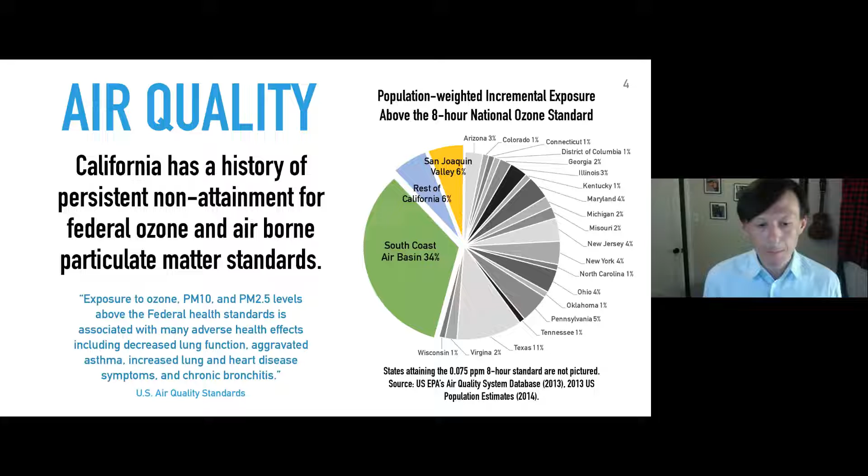California's freight transportation system is a vital part of the state's economy, but it's also a significant contributor to greenhouse gas emissions and generates an even higher portion of local pollution. In 2016, for example, a little less than 6% of the California vehicle fleet was heavy-duty trucks, but they represent more than 60% of NOx emissions and aerosol emissions from mobile sources. So these trucks tend to already operate in areas with poor air quality and can exacerbate existing unhealthy conditions.

So the state's primary strategy for reducing emissions from the on-road freight sector relies on deploying new vehicle and fuel technologies, particularly electrification of surface transportation. And electrification of heavy-duty vehicles provides an opportunity to both eliminate tailpipe emissions and also potentially reduce the total life cycle emissions, i.e. all emissions including the emissions associated with the production of the vehicle, disposal of the vehicle, production of fuel, as well as other impacts from vehicle operation.

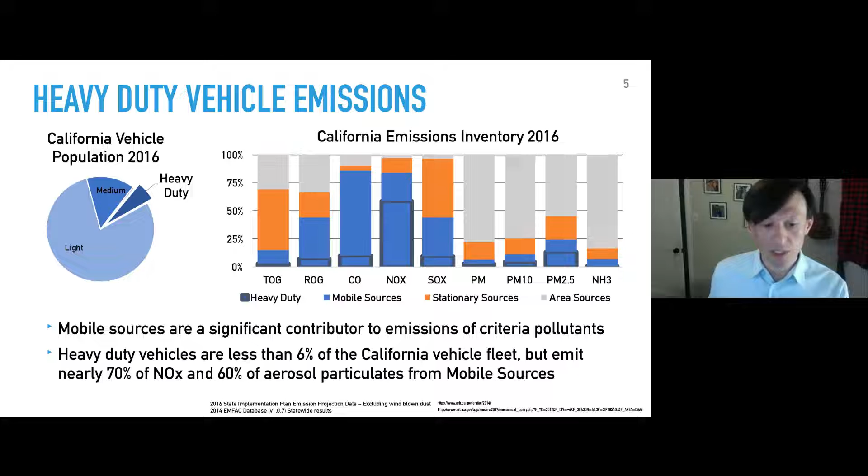So the goal of this study was to quantify the life cycle costs, emissions, and benefits in the form of reduced local health damage impacts from electrification of medium and heavy duty vehicles. The study builds upon a number of existing models and attempts to capture a wide range of vehicle vocations, designs, and duty cycles.

We focused on the California context and examined a target for 100% electrification of in-state registered medium and heavy-duty vehicles, and the focus of the study is really on the urban distribution context. So we're not including Class 8 type heavy-duty trucks that operate in a long-haul context, but rather focusing in on those medium and heavy-duty vehicles that are operating in the urban center.

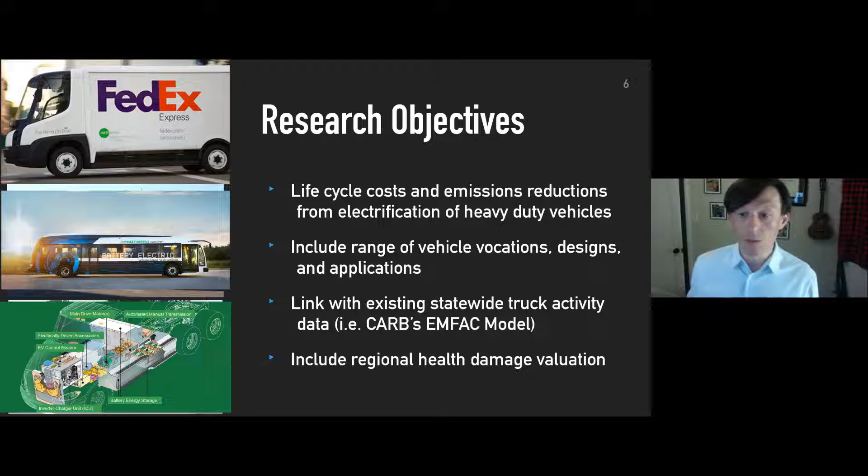In the study, we employed a life cycle perspective on emissions from conventional and electric vehicles. And this was to ensure an appropriate accounting of displaced or shifting emissions from switching to alternative fuels. And a life cycle perspective is really critical to compare potential impacts throughout the supply chain. For EVs in particular, the production of electricity is a critical component of the emissions attributable to an electric truck over its lifetime. And for that reason, our study focused on including a reflection of both current and future electricity generation in the state.

And the California grid, just to illustrate, here in California compared to some of the national case, has some of the highest targets for renewable energy generation regionally, and some of the highest renewable generation shares today. And it's important to take this into account when thinking about the potential benefits of electrifying medium and heavy-duty trucks.

So for the study, the primary source of life cycle inventory data was the Greenhouse gases, Regulated Emissions, and Energy use in Transportation model, the GREET model, maintained by Argonne National Lab. Energy and fuel price components, as well as the generation forecast, were obtained from the Energy Information Administration, or agency, apologies. And combustion emissions factors were obtained from the California Mobile Emissions Database, the EMFAC model. And we used speed-weighted combustion emissions factors to capture the differences in emissions over a duty cycle.

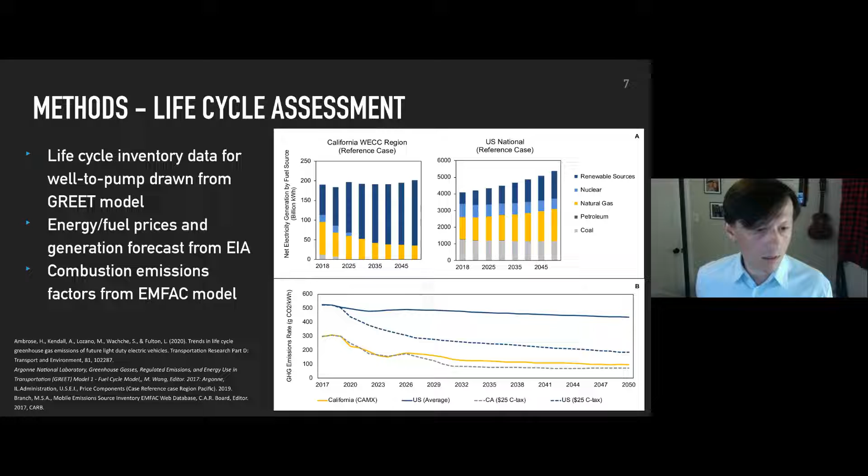This emissions analysis was paired with a model of life cycle cost, which includes pollution health damages. So pairing life cycle assessment and life cycle costing offers a robust framework for considering the costs and benefits of technology changes in the transportation sector. And the primary source of data for cost estimates here for the infrastructure costs and vehicle costs was drawn from the AFLEET model, another model that's maintained by Argonne National Labs.

In addition to the infrastructure and technology costs, we also included potential externalities in the form of reduced pollution health damages. And these marginal pollution health damage costs in the form of dollars per ton at near ground emissions levels were obtained from the Air Pollution Emissions Experiments and Policy Analysis model, the AP2 model.

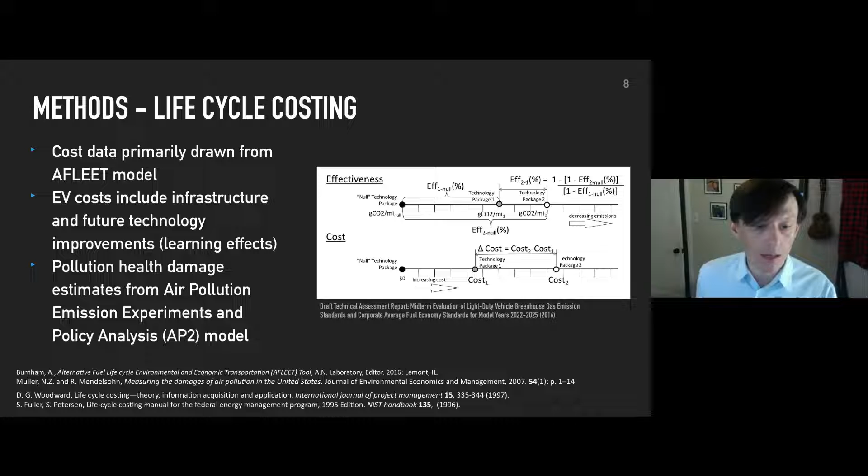So heavy-duty vehicles serve in a wide variety of vocations. They're highly customizable, including body and chassis configurations, which can be designed to support a variety of applications. And this diversity of duty cycles contributes to considerable uncertainty when estimating the costs or emissions benefits of electrification or fuel switching in general. So in order to endogenize that variability into our modeling, we evaluated a range of telematic data from fleets to characterize duty cycle characteristics, including the driving range, duration, acceleration, and stopping events.

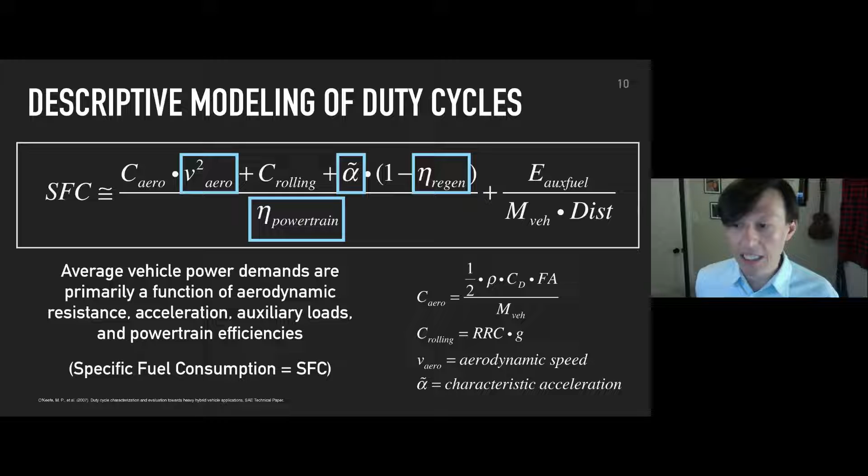So similar to the scaled tractive power approach used in some existing models like MOVES, we developed a descriptive model of vehicle duty cycles based on a specific fuel consumption metric. This allowed us to create a disaggregate view of costs and emissions reductions from electrification across this range of duty cycles, and also capture potential efficiency improvements in specific applications. And this approach also allowed us to examine the impacts of loading on fuel consumption.

To illustrate here, we can see the difference of a fully loaded versus unloaded vehicle type across a range of different vocations. So this can be highly important for comparing high intensity or highly inefficient duty cycles, like those moving cargo short distances around intermodal hubs.

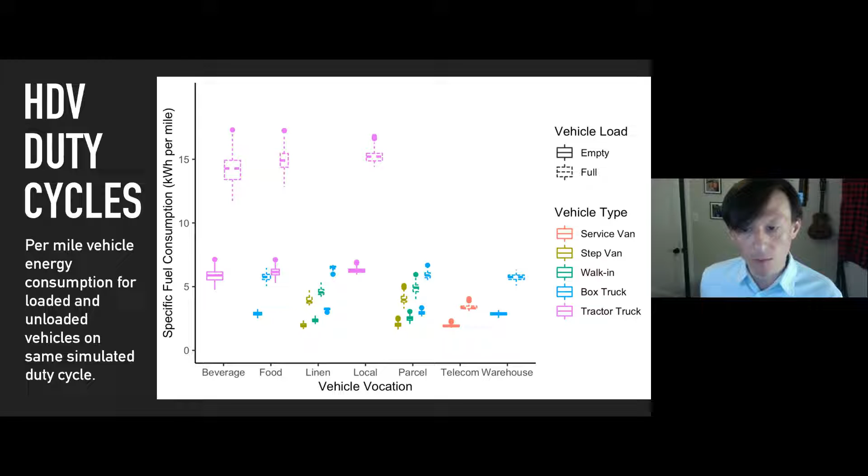Another unique contribution of this work was an in-depth examination of battery costs and energy storage and infrastructure costs for electric vehicles. Battery cost is a key driver of electric vehicle costs, but battery system sizing and the design of infrastructure are kind of a jointly estimated issue and highly dependent on the duty cycle requirements. So in order to examine the energy requirements of different vocations and duty cycles, we also analyzed trip patterns and durations to identify opportunities for opportunity charging.

So these opportunity charging scenarios can help inform potential futures where we have smaller battery sizes, but more available charging infrastructure, which has a trade-off in providing more efficient cargo space, as we have less cargo capacity or weight capacity of the vehicle tied up in an electric vehicle battery.

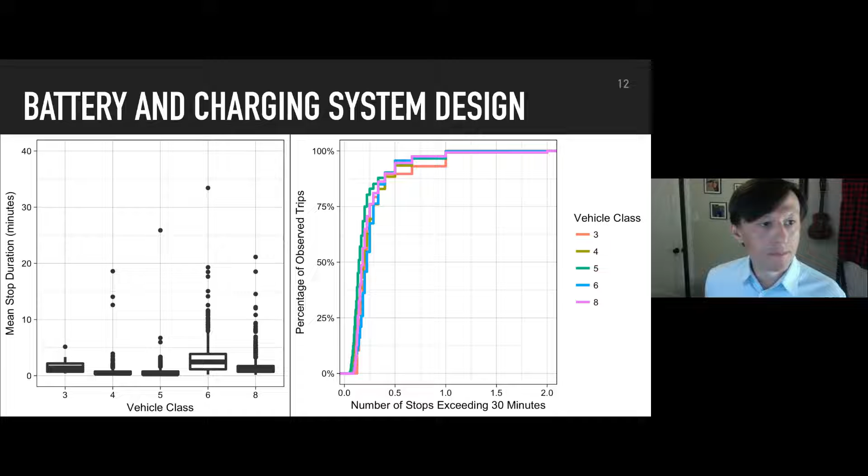I'm moving quickly through to just highlight some results. I want to keep moving so we can have some time for questions, as I think discussion is often very fruitful. So I'll just highlight a few of the takeaways for this, and I'll provide a link to the report at the end, and please feel free, I encourage everyone to review the results themselves.

So the wide range of efficiencies observed, particularly within the Class 8 segment, contributed to increased uncertainty in the emissions from EVs. So the efficiency of the vehicles on the duty cycle, a lot of duty cycles that required relatively high energy consumption, contributed to higher uncertainty in the emissions observed from EVs.

Unsurprisingly, when we look at this on a ton-mile basis, the trends tend to reverse, where smaller vehicles tend to look like higher emitting on a unit of mass transported basis. But in general, we observed that the life cycle emissions rates of some heavy-duty vehicles in these vocations were much higher than the estimated combustion emissions rates on average assigned to that vehicle class.

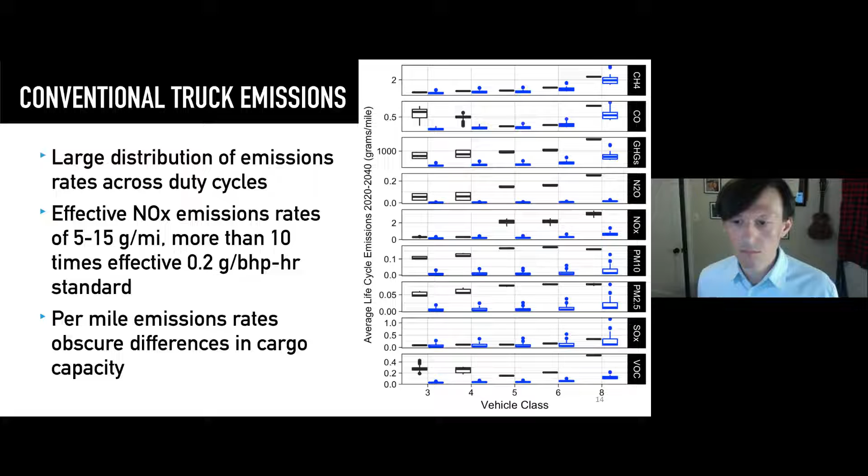So today, the costs of electric medium- and heavy-duty vehicles remain highly uncertain. And one of the big drivers of this, in addition to variability in duty cycles, is the variability in energy costs. Electricity prices can vary quite strongly across regions depending on demand charges and other types of rate structures. In California, obviously, there's been a considerable amount of development on this front, with collaboration between utilities and fleets to come to agreeable rate structures. But given the variability in rates, that can contribute to a lot of variability in the potential fuel cost savings.

In addition, as battery costs are falling, performance is improving, which means that the amount of mass required to move the battery, as well as the amount of cargo capacity that might be lost to an additional battery system, will also decrease. And this means that electric heavy- and medium-duty trucks are more likely to be economical in an increasing range of applications.

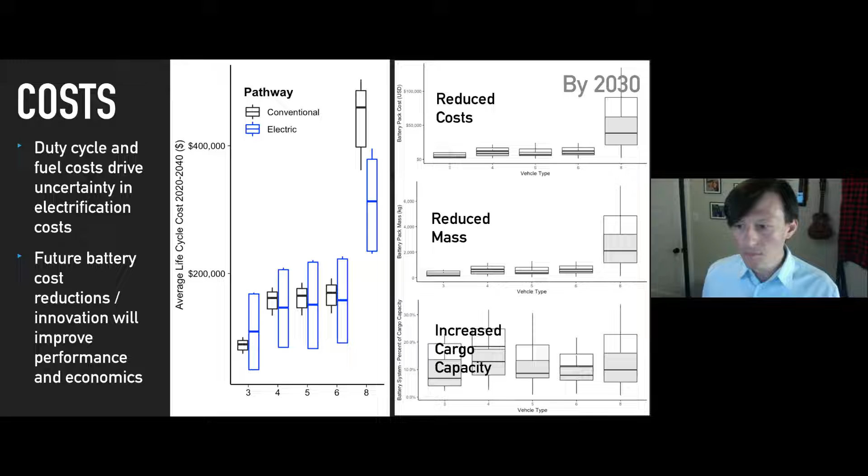So this report is available for download, and I encourage anyone to feel free to examine it and reach out with any additional questions. There's a lot more research required to understand and improve our ability to quantify the benefits of vehicle technology and fuel switching, particularly of electrification of surface transportation in the medium- and heavy-duty sector. And there's also an opportunity, I think, at a finer scale to look at rerouting, geofencing, or other strategies which can help reduce exposure to conventional vehicle emissions in the meantime, while we collectively pursue a low carbon fuel system.

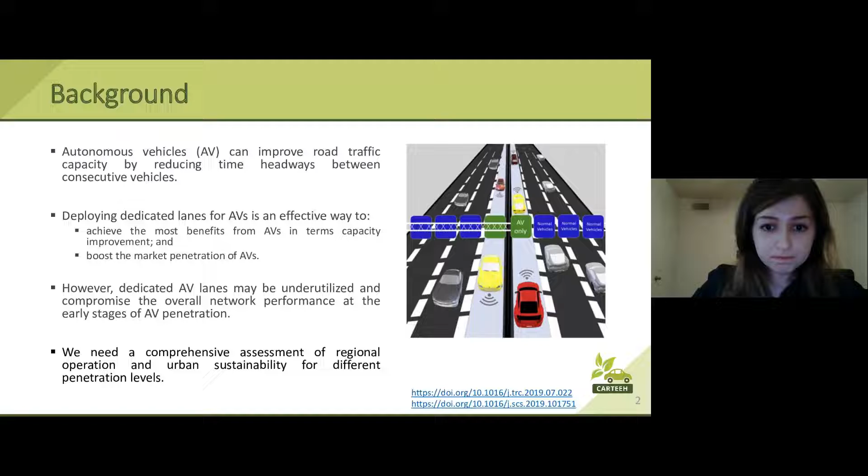Our study's goals were first to incorporate the AV demand activity into the current travel demand model, and second to construct the dedicated AV lane configurations into the existing roadway network. Finally, we wanted to assess the environmental and societal role of dedicated AV lanes at both regional and project levels. So we assessed the greenhouse gas emissions and other criteria pollutant emissions as the environmental assessment, and we studied the health impacts or the asthma cases attributable to traffic-related air pollution as the societal impact of dedicated AV lanes.

So our case study was done in El Paso. El Paso is located on the southwestern part of Texas, and it's a major freight hub with several ports of entry to Mexico. So there is a high traffic activity and truck activity in this region, and El Paso is designated as a non-attainment area for particulate matter 10 according to the National Ambient Air Quality Standards. So every transportation project happening in this region needs a vital emission and health assessment.

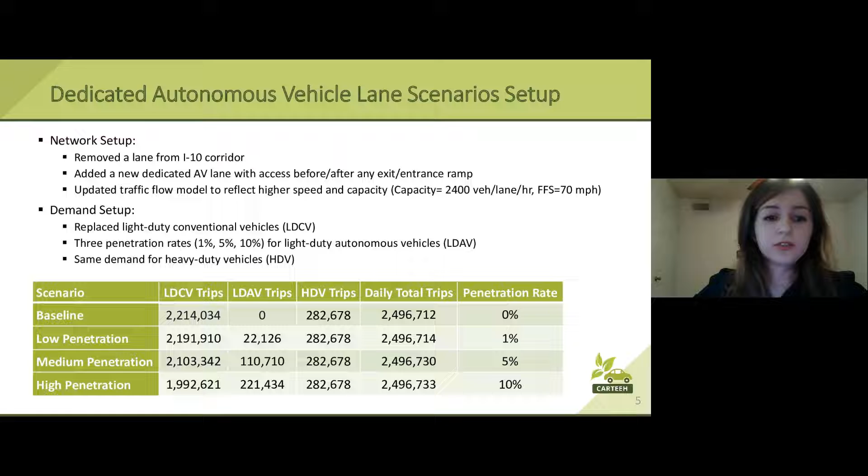Next setup point was to set the demand for the autonomous vehicles. We replaced some of the light-duty conventional vehicles with light-duty autonomous vehicles at 3 penetration rates, 1%, 5%, and 10%. So you can see the four scenarios here in the table, and the baseline has 0 penetration rate, and the highest penetration rate is 10%.

Then we used our platform to assess transportation health and sustainability tool, PATH, to assess the environmental and health impact of each scenario. PATH is a cloud-based modeling platform for automating and integrating transportation emission and energy models.

The pipeline first gets the travel demand models and adjusts them using our penetration rates for autonomous vehicles. Later, we use these demands to generate the network congestion using the dynamic traffic assignment. Then we generate the link level emissions using the MOVES matrix and the network congestion, and we assess the pollutant dispersion using AERMOD. Finally, using the health impact studies, we assess the asthma cases attributable to traffic-related air pollution at each neighborhood.

Each scenario has been conducted 5 times to include the significance of the environmental and health impacts.

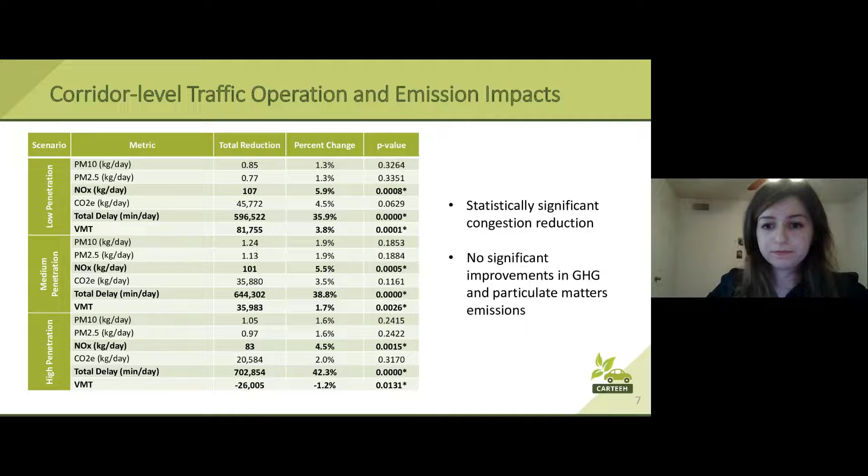Also here in the higher adoption, higher penetration, you can see some of the vehicles were rerouting from other alternative routes to this I-10 corridor. According to the table, we cannot really capture any significant improvements in greenhouse gas emission or particulate matter emissions.

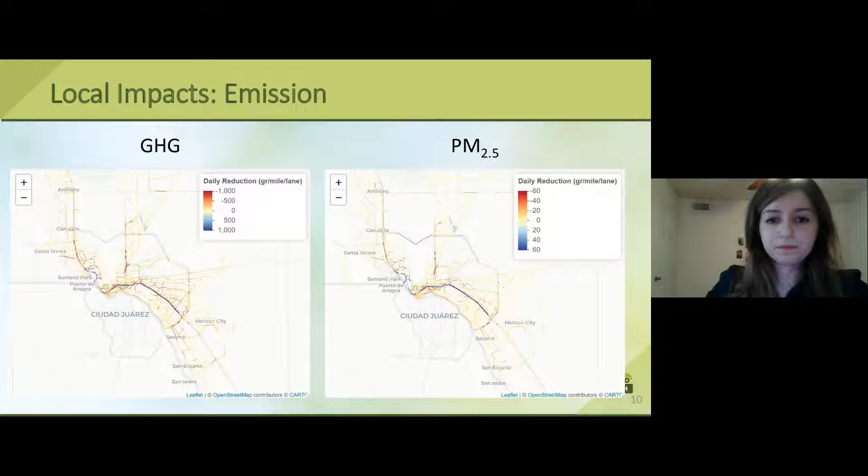Again, translating it into the dispersion and attributable asthma cases, we can see some changes at different splits of the corridor, localized changes at the alternate routes, at the downstream and upstream, and around the border.

So in this study, we assessed the environmental and health impacts of the dedicated AV lane, and environmental impacts were assessed using the greenhouse gas emissions and criteria air pollutants. And societal impacts were also assessed in terms of health impacts or asthma cases.

Significant congestion reduction was observed at both corridor level and regional level, and no significant changes were observed for the regional emission. However, we could observe some localized emission and health changes, asthma case changes, in our spatial map. So a dedicated AV lane is really an effective tool for congestion relief while changing the flow pattern for the emission and health.

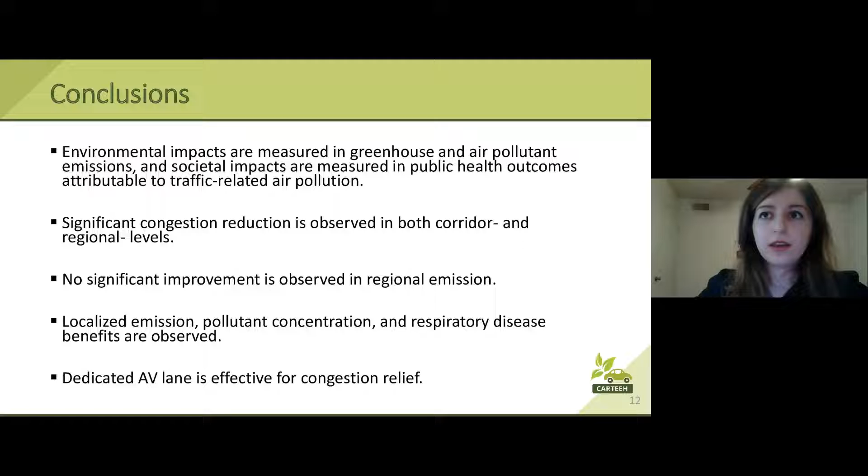Dedicated AV lanes are actually a lane management plan, and they manage the lane by assigning the access. So like all other lane management plans, they are a viable option for congestion relief. They cannot be counted as a climate change tool. And still we can observe some changes over the local neighborhoods in the emission and health impacts. However, zero emission AV lanes may promote zero emission AV penetration in the region more, and they may have different implications if we study those cases.

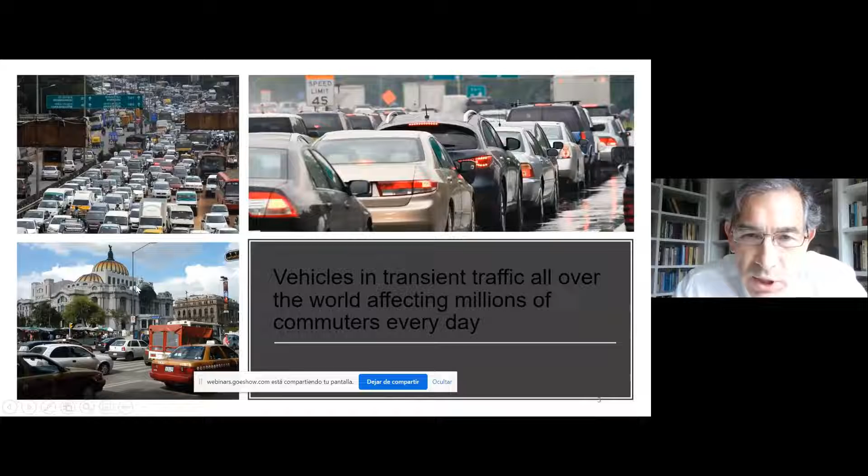Transient traffic, stop-and-go traffic, is a ubiquitous feature of daily urban life. As motorization grows, this phenomenon is certainly going to grow even more. Larger portions of commuter time will be spent under these conditions, consuming energy and aggravating emissions. Since transient traffic includes sharp braking and short accelerations, usually after a long idling time, important fine-scale dynamics must be included in the analysis. There are a lot of events that happen in very short time that have to be included in order to capture all the dynamics of this type of traffic regime.

Also, this traffic regime is difficult to reproduce by a driver, even under controlled conditions in a laboratory. And if you try to circumvent this problem by averaging, then important dynamics might disappear. In today's presentation, I'm going to have a different approach from what was previously presented, in that my approach is microscopic. That means I'm going to be following vehicle by vehicle at a 1 second time scale. And this microscopic approach is especially tailored to study transient traffic.

Basically, this scheme is based on an observational technique using video tracking analysis to capture necessary high-resolution dynamics, as I will show. Two, an agent-based traffic model, SUMO, to obtain high-fidelity driving cycles, and it's a microscopic agent-based traffic model. Number three, we pair all these to a complex vehicle simulator to obtain energy use, fuel consumption, and emissions of

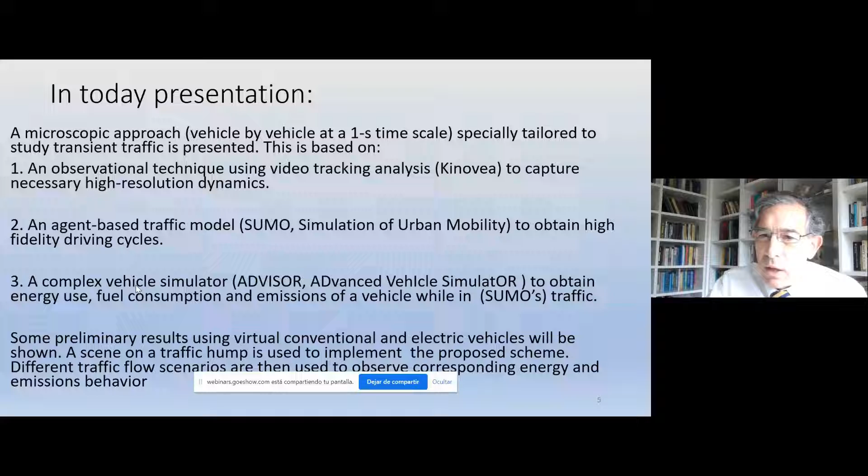The scene where we apply all this scheme is on a hump in a street, because therefore we can use a theoretical model, a theoretical M/M/D traffic queuing model that we can compare our results with, besides, of course, the measurements. And once this is accomplished, that we know our system is working fine, we then vary the flow scenarios and observe the corresponding energy and emissions behavior.

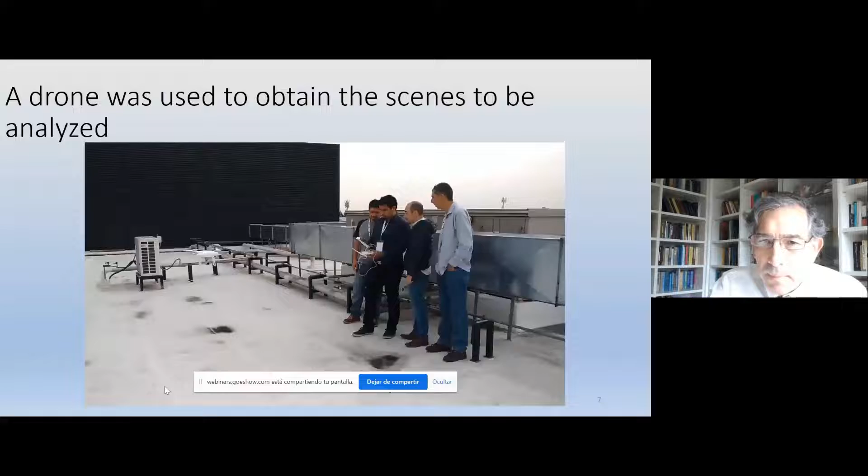So what about the video tracking observational technique? Well, we use a drone in order to obtain the video of the place where we are going to be observing the traffic. And this is the output of the Kinovea tracking system, in which you can see that we are able to obtain the velocity of the vehicles, the instant velocity, quite well characterized. Every second we are able to obtain the instant velocity of all vehicles passing through the hump, which is not very well marked.

So when you drive in Mexico City, be very careful.

But the important thing is that you can obtain the instant velocity very accurately using this video tracking technique. Also, you can obtain the traffic flow characterization, different types of vehicles that are passing through your scene, through your window. And you can also check the lanes distribution. This is going to be important for when you apply queuing theory. And of course, you can obtain the hump crossing speed of all the vehicles that are going through.

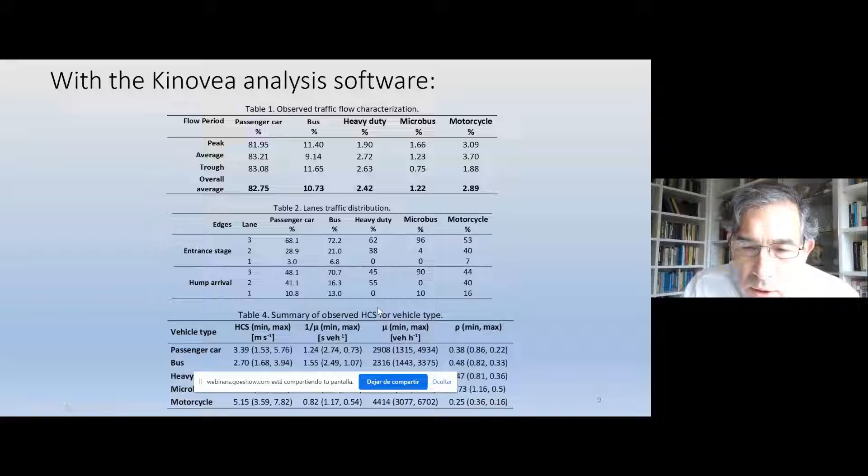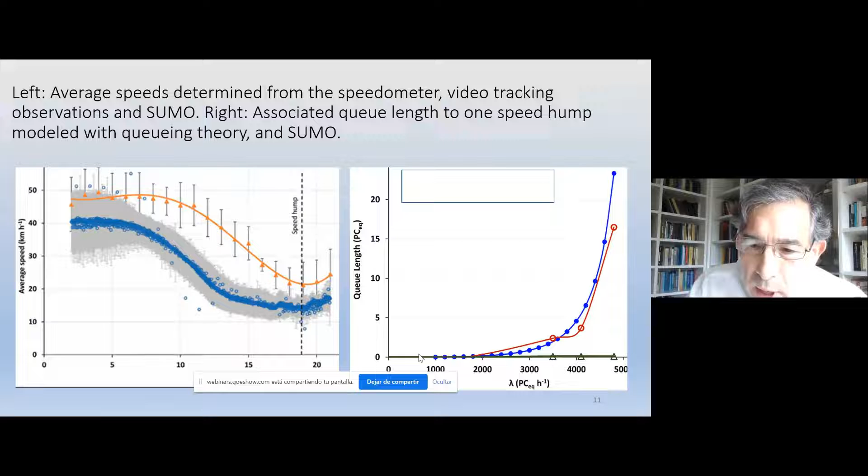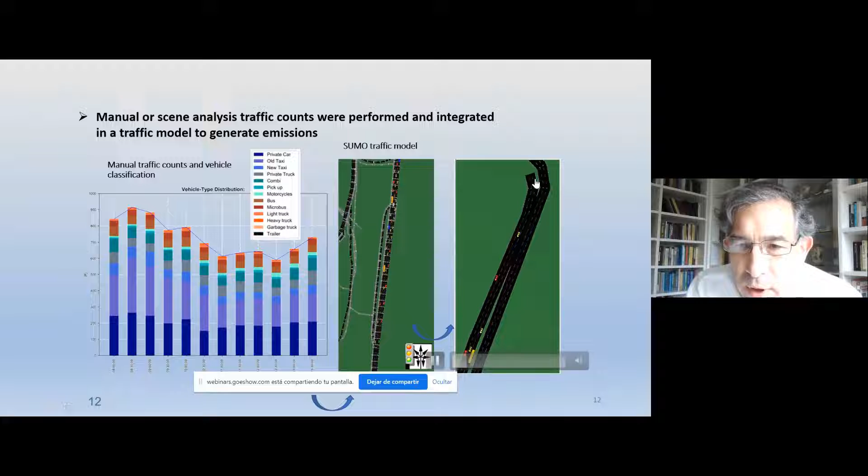Once we know that our traffic model is working well, and we are confident that it's working well, we vary the traffic flow in order to obtain our different scenarios. This is an output of SUMO, in which we have the cars crossing where we want to observe the traffic, but where this traffic in SUMO is characterized with the right amount of each type of cars that are entering. This is our border where all the different cars are entering. So we're able to simulate the traffic where we want with the right traffic characterization.

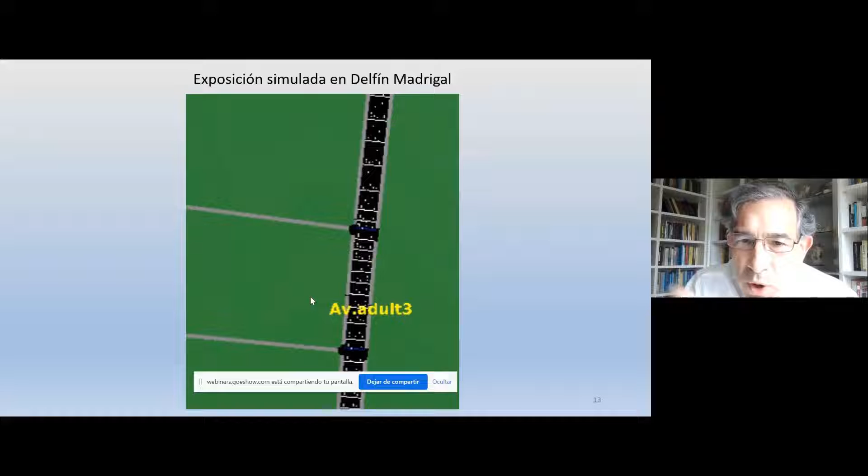I'm going to show you one more graph, which I think is interesting. And this is where we want to simulate our traffic. Here is the hump. But since Sumo is an agent model, a microscopic agent model, we can also simulate pedestrians and different types of pedestrians. If we put the right dynamic data, we can simulate adults, the way they walk, and children. And we then compare our simulations with traffic.

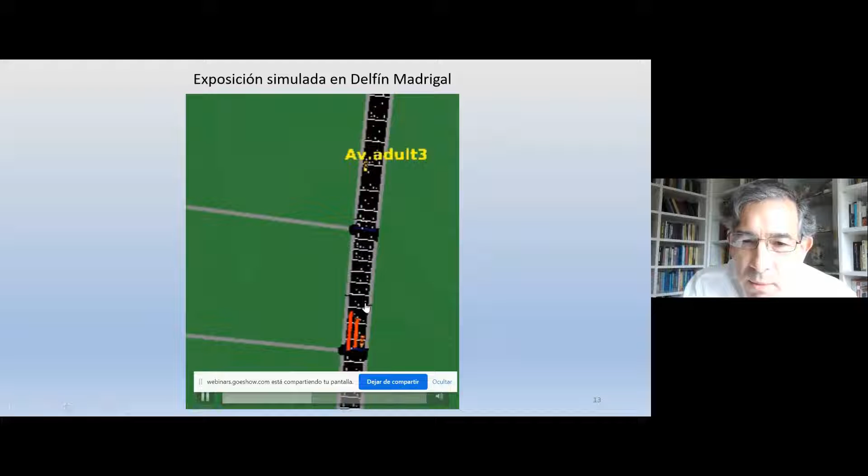This is red because the bus is just stopped before the hump, all right? And once they go away from the hump, they acquire another color because they're going faster. Okay, I think Sumo is quite neat to use. Then we have thousands of driving cycles generated by Sumo, and we hope they're correct with the correct dynamics, and we put them into a simulator.

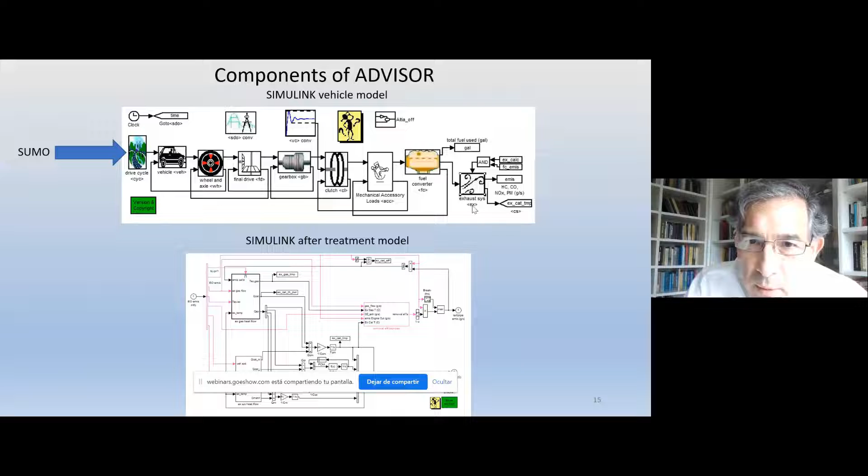This simulator, we're going to try to change it to Autonomie, but meanwhile, we're using ADVISOR of the Department of Energy, and from Sumo, we put in the thousands of driving cycles that were generated, and at the end of the simulator, we can obtain the emissions, the fuel usage, and all kinds of other parameters. Of course, each of these boxes contains a lot of information about the gearbox, about the weight of the car, etc.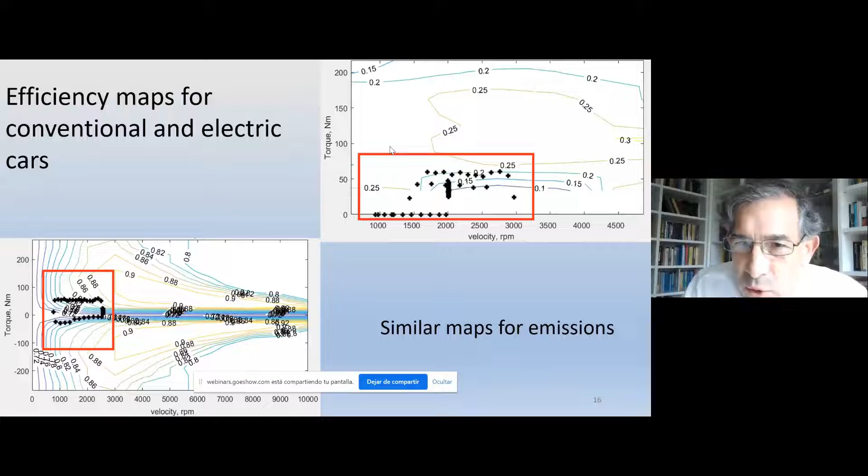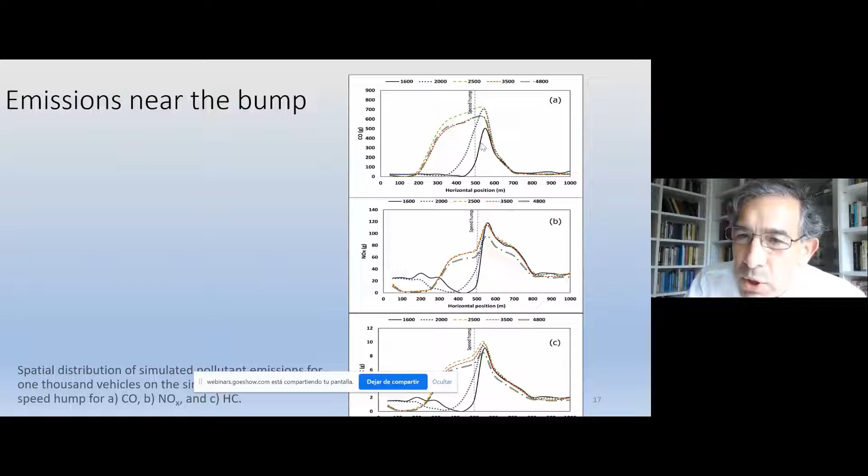One neat thing about ADVISOR is that you can obtain the emissions and place the emissions where they happen, because we have emissions every second, for each of the different traffic flow scenarios. For example, when the queue is already formed behind the speed hump, you can place where the emissions are taking place. And when there is no hump, when there is no queue, this is where the car goes. This is for one car. You can follow every single agent. I think this could be interesting for roadside exposure studies.

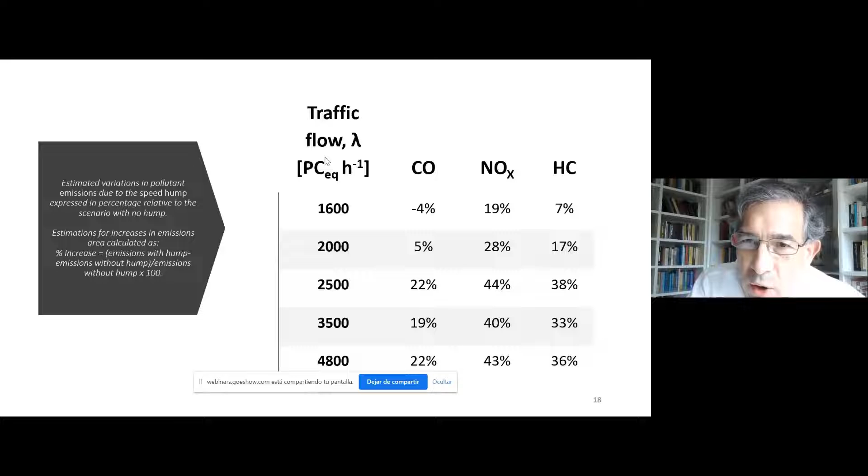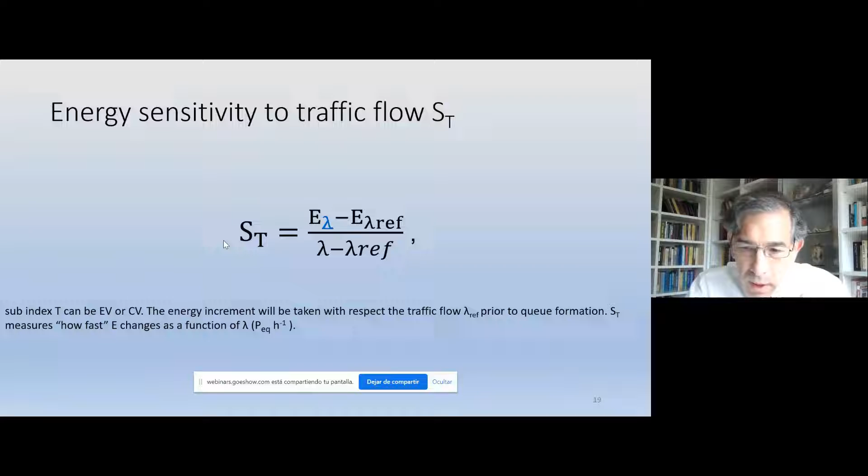This way, if you follow one of the Sumo cars, you can obtain the changing emissions for the different scenarios, and you can obtain a comparison as traffic flow grows. What are the emissions in the window that you're observing? Also, you can do the same thing for energy expenditures when you put as a reference point the scenario when there is no queue, and compare it when the queue is growing, and obtain the difference, a sensitivity analysis of different technologies.

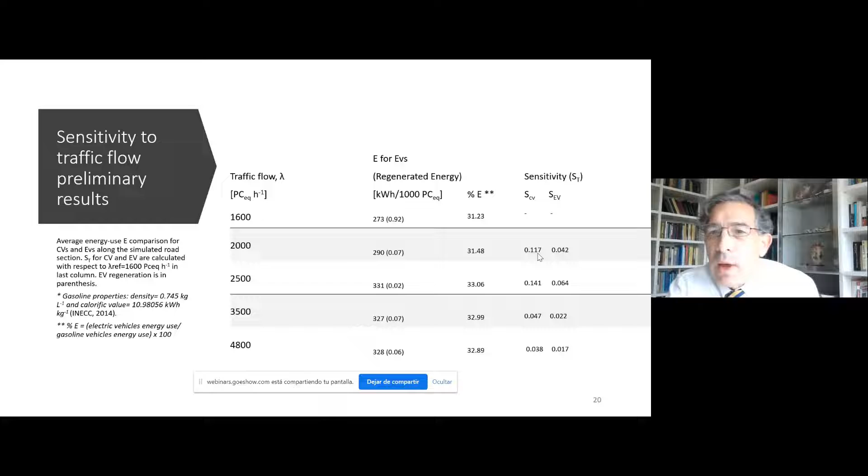We found, besides that, of course, electric vehicles spend much less energy than conventional cars. In this sensitivity analysis we obtained that electric vehicles are much less sensitive to the growth of the queue, and I think that's important as transient traffic grows. We now know that electric vehicles are less sensitive than conventional cars to transient traffic.

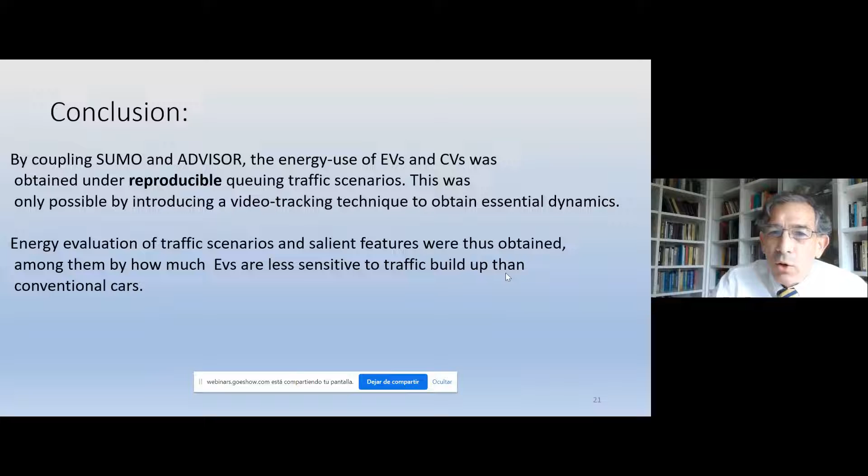As a conclusion, by coupling Sumo and ADVISOR, the energy use of EVs and CVs, electric vehicles and conventional vehicles, was obtained under reproducible queuing traffic scenarios. And I stress the word reproducible. This was only possible by introducing a video-tracking technique in order to obtain essential dynamics, not possible using GPS or a velocimeter. Energy evaluation of traffic scenarios and salient features were thus obtained. So you have a model, you can reproduce as many scenarios as you want. Among the traffic salient features, we are able to obtain the energy expenditure for different technologies and also their sensitivity to traffic buildup.

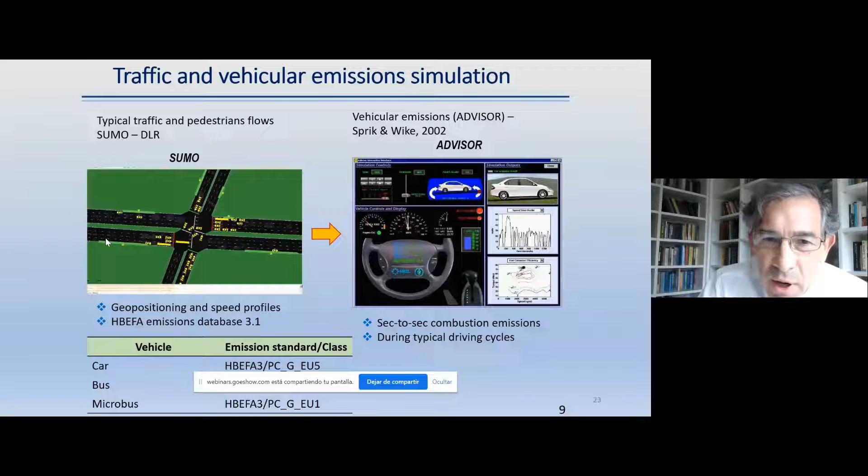Okay. Well, as a free announcement, I'm going to end this talk by quickly showing you the things we do at my institution. We would like to have, of course, more complex situations. This is a more complex situation to obtain the energy expenditures using, for each agent, different types of technologies, electric cars, hybrid cars, etc. We also do CFD.

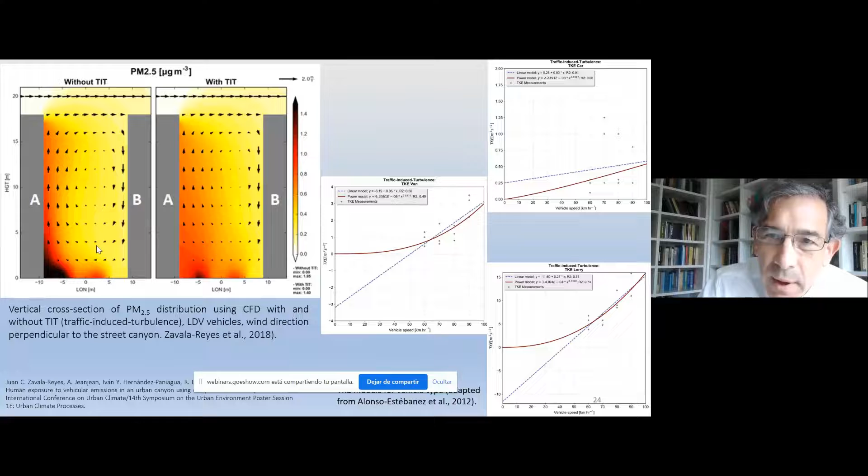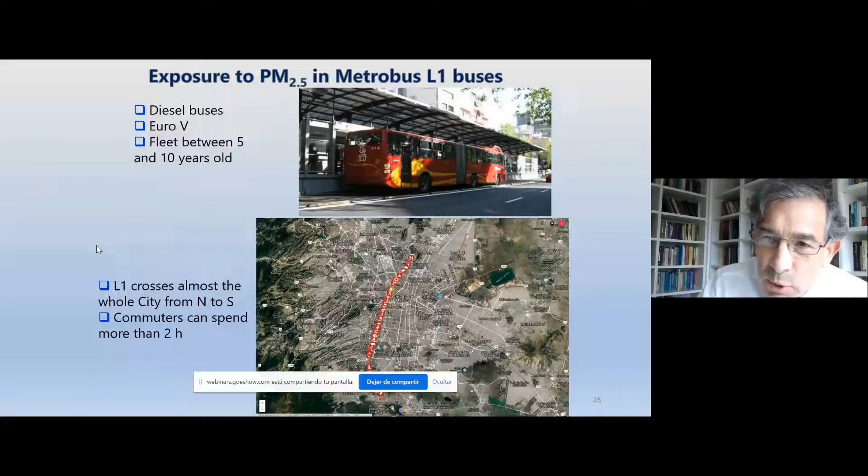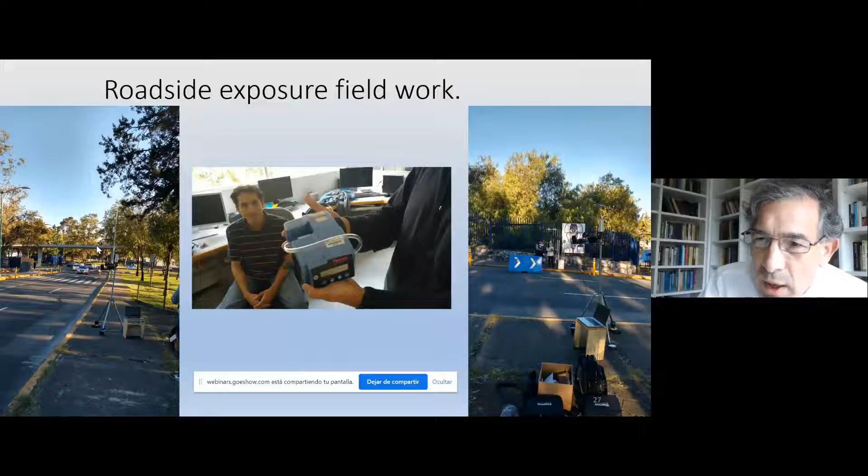This is two buildings and how the emissions of PM2.5 distribute in an urban canyon using different turbulent parameterizations. We also measure exposure to passengers in different traffic transportation systems. This is here an example. And we are spending a lot of time now to obtain data and modeling road exposure. And these are just some photographs of one of our latest campaigns.